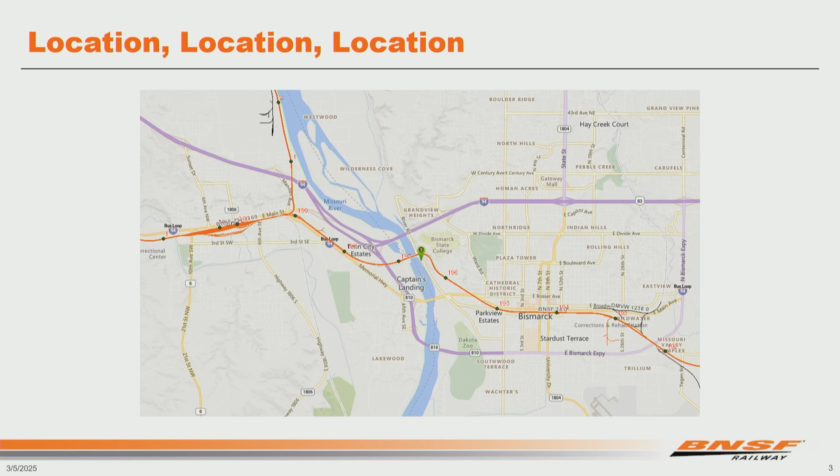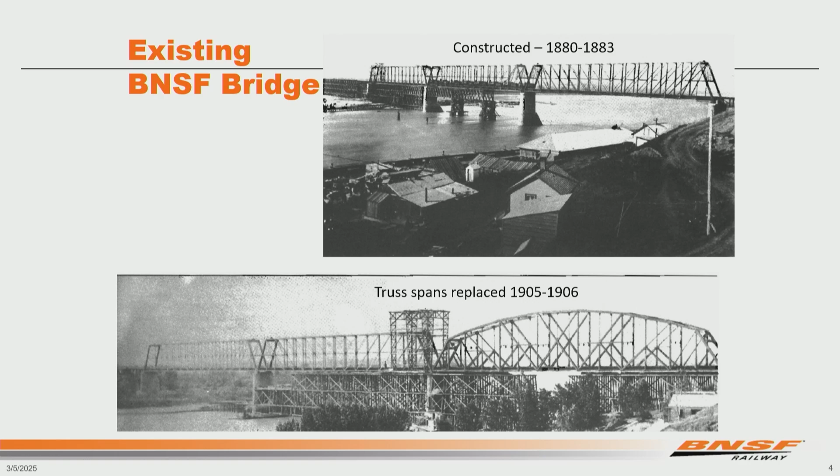Okay, let's talk a bit about our existing bridge. As far as what our project is, there are 3 areas that I'm going to hit on. On the screen now, we have some pictures from the original construction and a follow-up project that took place. The picture in the upper right-hand corner is the finished product from George Morison when they built the bridge in the early 1880s. And then on the lower part of the screen is the follow-up project that took place a few decades later where they had to replace the 3 truss spans.

This project to replace the spans was driven by the dramatic increase in the weight of locomotives and rail equipment. And for me, it hits on the point of everything has a finite life. And for these spans, it was a short life. It was only a couple of decades.

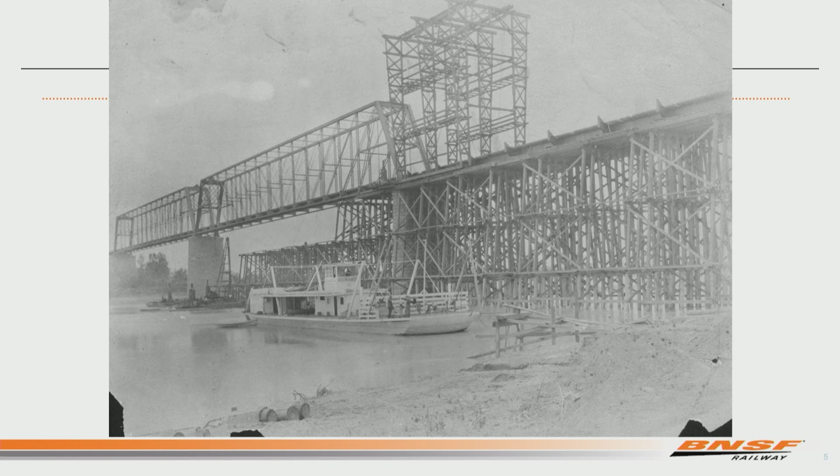I could sit here and geek out about looking at these pictures. I find them so interesting, looking at the construction techniques they used to replace these spans and do this big work back in the day when machinery wasn't as plentiful. I think about the amount of false work they're using to support the spans for disassembly of the existing spans, and that gantry system that they're using to assemble the new spans. And what I want to hit on with looking at these pictures is, first and foremost, BNSF's project is a condition-based replacement.

Cornerstone of bridge ownership is bridge inspection. It's getting quality and timely bridge inspections, watching how that bridge ages, watching how it responds under load, and then using that information to determine what repairs you need to make. Over time, for railroads, it's a matter of placing restrictions. In the case of this bridge, we currently have speed restrictions for trains traversing it, in addition to weight restrictions that prevent certain short, heavy cars and certain products from traversing the bridge, plus the inherent dimensional load restrictions you get with any through truss span.

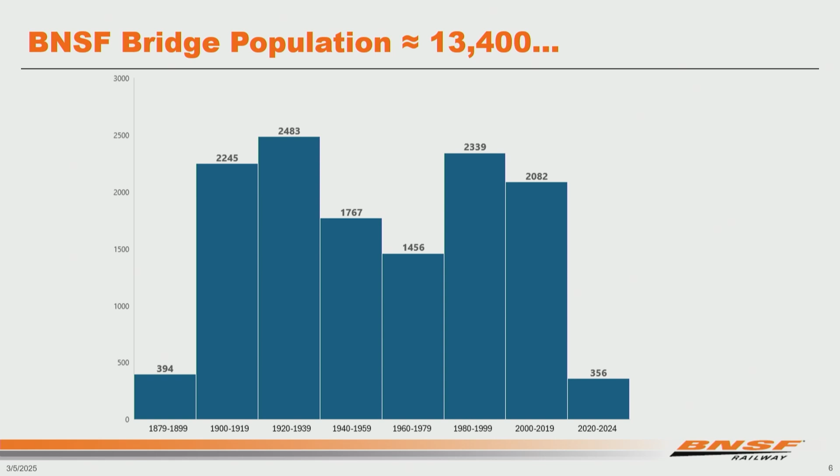The point I want to hit on with this slide, second part around what the BNSF project is, that $100 million price tag to replace this bridge in Bismarck is 100% privately funded. No grants involved. It's purely part of our capital replacement program.

Last point I want to hit on talking about the BNSF project is looking at the population of railway bridges over the Missouri River, from the headwaters in Montana down to the confluence of the Mississippi River in St. Louis. This bridge is one of 22 railway bridges that traverse the Missouri River. These bridges are owned by various Class 1s and short lines, and their age ranges from the 1880s to 2013.

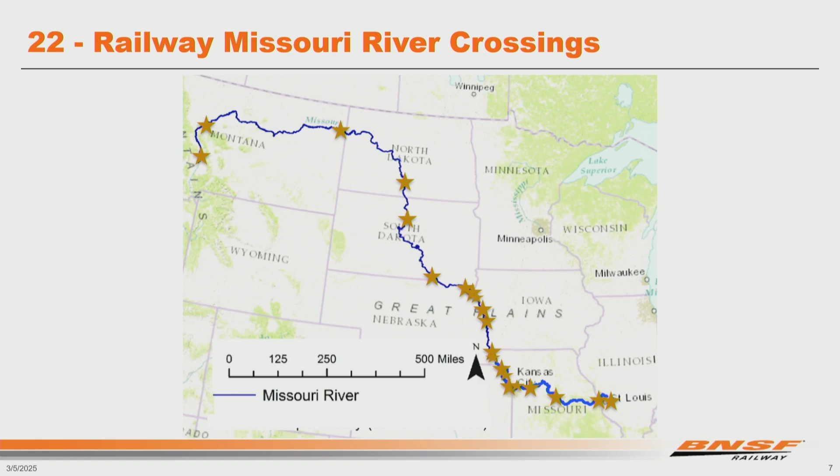The next few slides show some examples of other heavy bridge projects, these larger projects too big for us to do, and larger bridges where communities have a connection to their bridge. This one is a Trinity River Bridge just north of downtown Fort Worth, Texas. You can see the truss in the foreground, and in the background a couple other trusses. What's hard to discern in this picture is those trusses in the background are on subsequent tracks belonging to other railroads, and they were affectionately known as the Three Sisters Bridges.

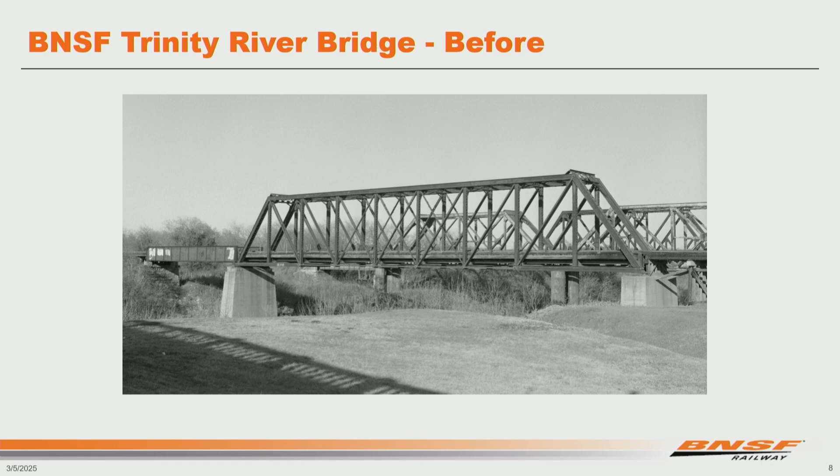When we came to replace this bridge, there was some emotion around it. It was a piece of history in Fort Worth. Some similarities this project has with the Bismarck Bridge project is our ultimate design concept utilized something other than truss spans. We were able to optimize it for cost and schedule, and the replacement concept went in with through-plate girder spans. The picture on screen now shows construction in progress, and this bridge will be done yet this year.

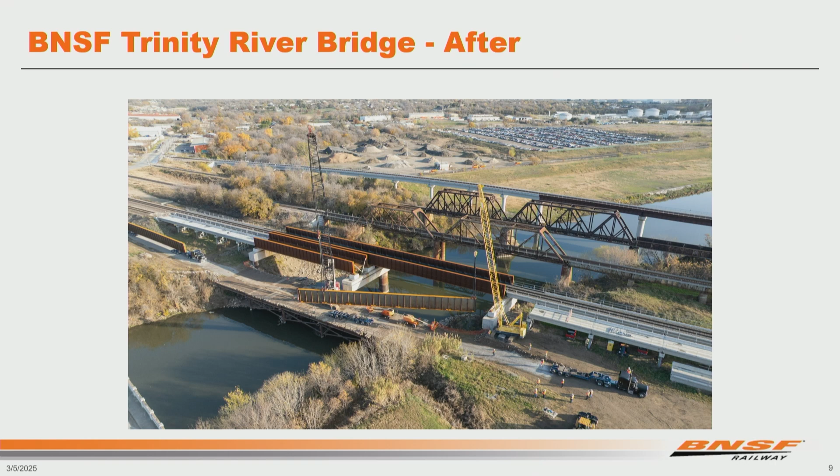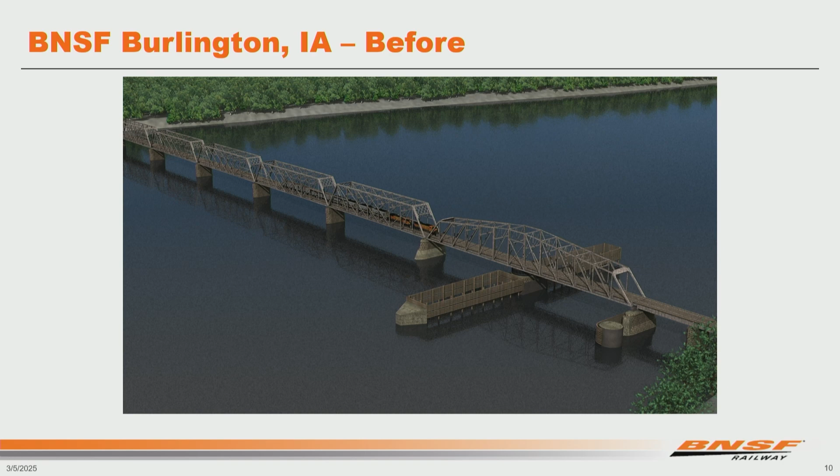Next example of a heavy bridge project, a little bit larger scale, a little bit more ties to the Bismarck Bridge. This is in Burlington, Iowa, over the Mississippi River. This is another George Morison bridge from the early 1890s. So this project, all these projects, are condition-based replacements. In this picture, you can see how the approach spans are being replaced with truss spans, and that was what made sense with regards to maintaining openings for marine traffic and the conversion of the swing span to a vertical lift span.

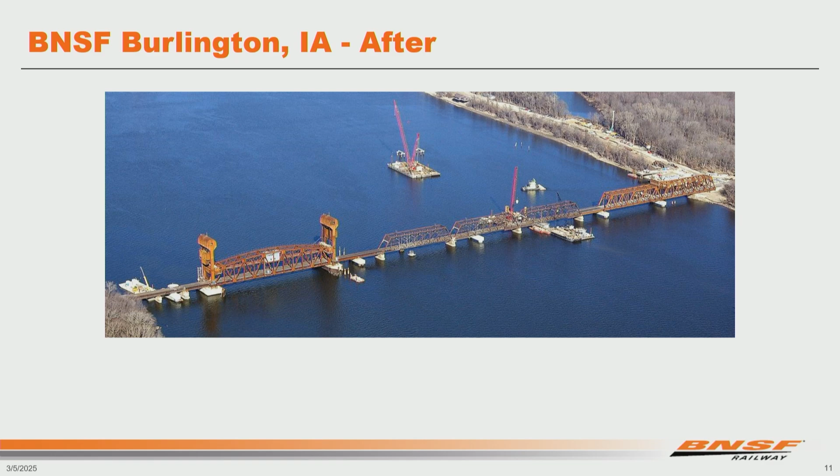Okay, shifting gears here a bit. Next topic, let's talk about what BNSF expects and considers when developing this project. Going into this project, BNSF had 3 criteria that we needed the replacement bridge to meet.

First and foremost, we wanted piers for the main river spans that could accept a future second track. We have no plans for a second track. This is just a step we take recognizing the cost, effort, and environmental impact associated with constructing these piers. We're willing to construct them essentially at our own risk, because if we ever do come back, this will be the most difficult part of the project, and that way it would already be constructed.

The second criteria is minimizing impacts on the environment and the public. And third, having optimal cost, schedule, and efficiency. Going through the rest of this presentation, there will be multiple examples of deliberate actions by BNSF to satisfy the minimization efforts talked about in criteria two.

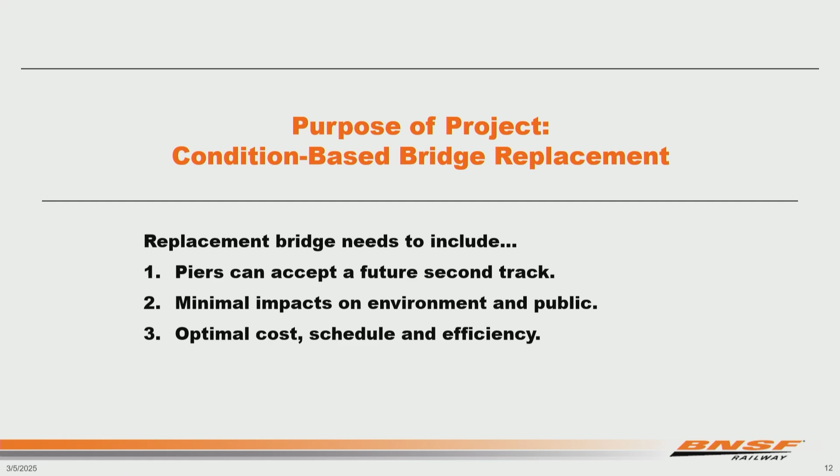Here's a map of the immediate area around the BNSF bridge. This slide shows features in the vicinity of the bridge that strongly influence the preferred concept. In the northeast quadrant, you have high bluffs with underground water reservoirs. Traversing across the bridge, you're roughly 90 feet above the water, landing on the west side where you're in a very tall embankment, roughly 75 feet tall.

Just a bit further west, you have the BNSF overpass going over the Bismarck Expressway. To the north, on the west side, you have the Missouri River Natural Area, and to the south, you have our neighbors in the Captain's Landing Township.

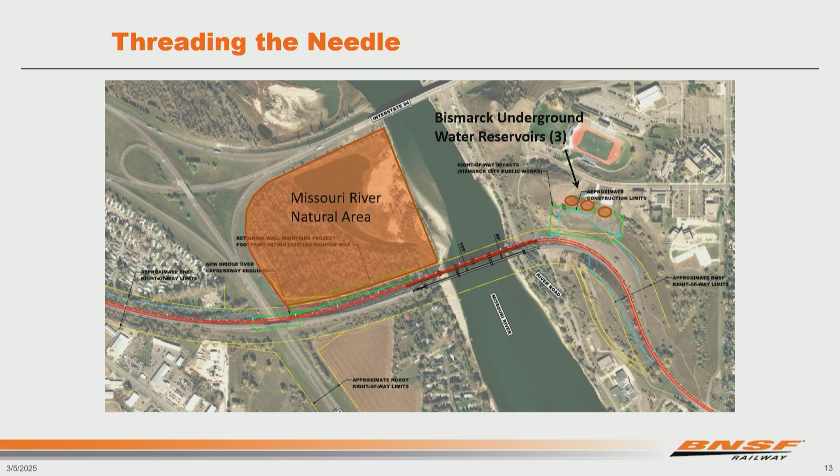During project development, it quickly became evident that to satisfy criteria 2 regarding minimizing impacts on the environment and the public, and criteria 3 for optimal cost and schedule, the replacement bridge needed to thread that needle through these features by staying within the BNSF right-of-way corridor.

Okay, this slide really gets at what we expect. This slide shows the 31 heavy bridge projects that have been completed over the last 10 years.

The 64 million dollar question at the start of developing this project: how long is it going to take? How long to have the design complete, permits in hand, land and easements acquired, any utility relocations, funding and contracts in place to start turning dirt so we could program this funding?

This slide shows all 31 projects from the last 10 years, and the duration represents the timeframe from signing a contract for design to signing a contract for construction. The current average looking at these 31 projects is right around 3 years.

One item to note, these bars are sorted by duration, not chronologically, so there's not a recent trend on what it's taking to get through the permitting process. Interestingly, the 3 most recent heavy bridge projects for BNSF that we are just now starting construction on were developed from the conceptual phase to signing the contract to construction in only 18 months.

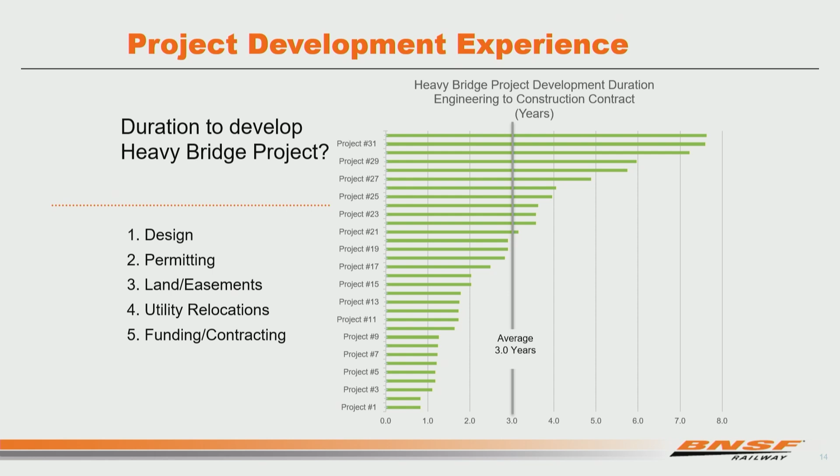The other question we often get is, as all these concepts were offset to the north, did you look at anything offset to the south? We did this intentionally, because any offset to the south would have encroached much more on our neighbors in the Captain's Landing Township. The permitting process for this project was emotional, and I'd suspect that encroaching on property people actually own would have made it that much more emotional.

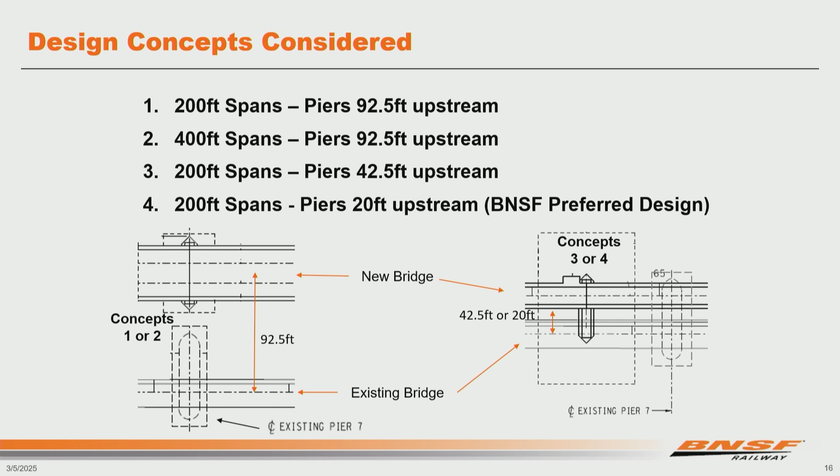A couple more comments about the design concepts considered. The first two, at 92.5 feet upstream, are illustrated in the lower left corner, showing the piers of the new bridge aligned with the piers of the old bridge. Having piers aligned like this, with that 92.5-foot offset, pushed us outside of our right-of-way or dramatically increased the cost to stay within it. Looking at concepts 3 and 4, offset much less, we were able to achieve a no-rise condition—however, that no-rise was only achievable with the existing bridge being removed.

So let's talk about why no closer than 92.5 feet—that seems like a heck of an offset. The reason is the upstream side of the existing piers, the icebreaker. What you see above water is not the full extent of that pier; as you go down below water, it continues to extend further to the north. At 92.5 feet, that only gave us around a 10-foot buffer between the edge of the existing pier and the edge of the cofferdam needed to construct the new piers.

So even with this minimal 10-foot offset from the existing pier, that poses a risk to BNSF during construction, where we could potentially compromise our existing bridge before we're ready to put the new bridge in service.

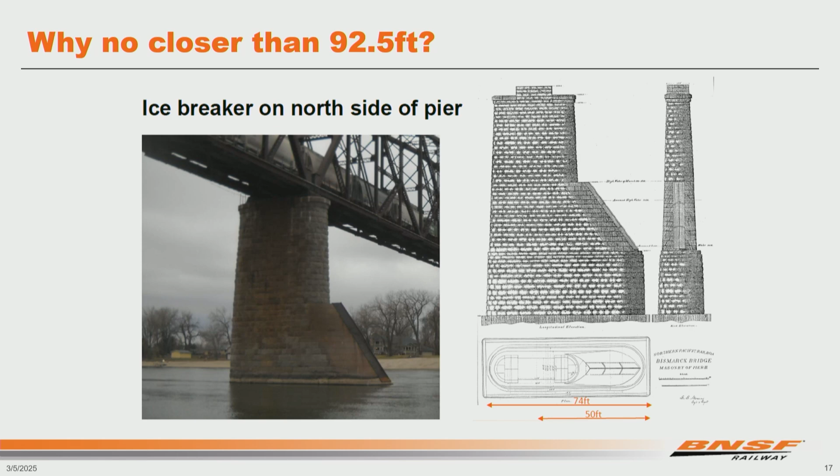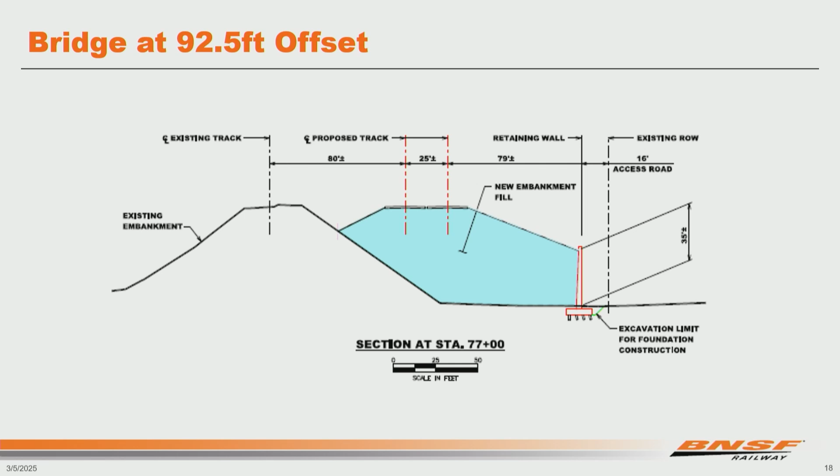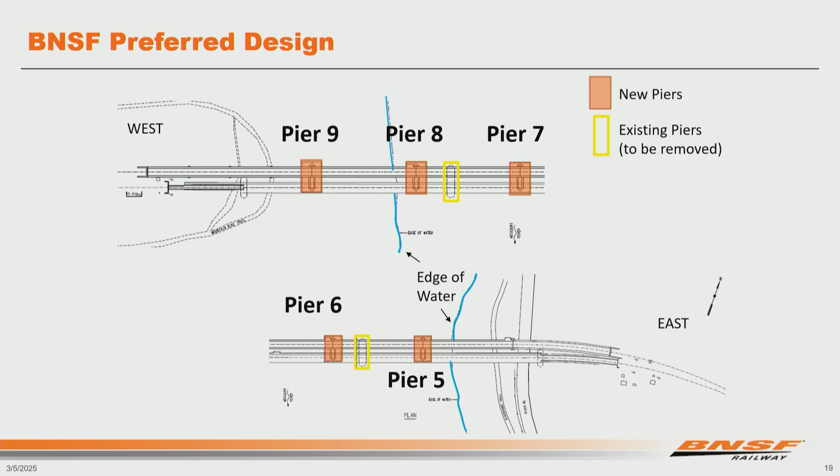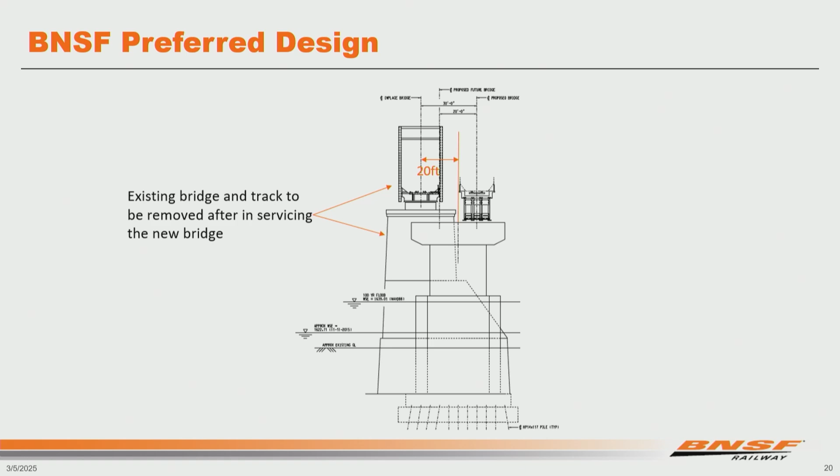This is the configuration we'll have once we line traffic over to the new bridge and before we start demo operations.

And lastly, I see a bridge that has minimized the impacts to the environment and community during construction.

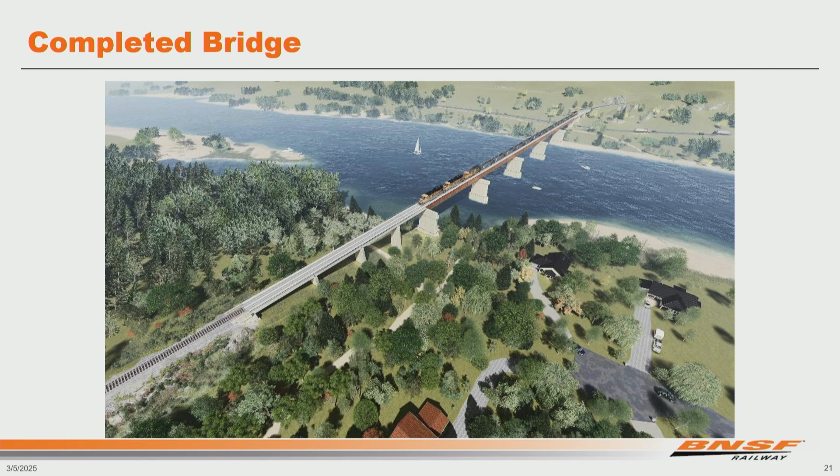What you may not immediately see in this rendering is the effort employed on the land piers. During the design, the land piers took into account the potential need for a future second track. The batter of the pile, the shape of the piers, the shape of the stems, have all accounted for that second track should it ever come to be.

To clarify on the topic of a potential second track, we have no immediate plans for needing one. That will be driven by train traffic, and should that day ever come where we need to build a second track, BNSF will have to go through the same federal permitting process to address the impacts associated with that project, long before any construction starts.

The west side of the river had the greatest need for material delivery, starting with a couple hundred thousand yards of fill to construct the new west embankment. At this time, I'd like to give a big thank you to the North Dakota DOT for working with BNSF on the need to minimize construction traffic on the Mandan residential streets.

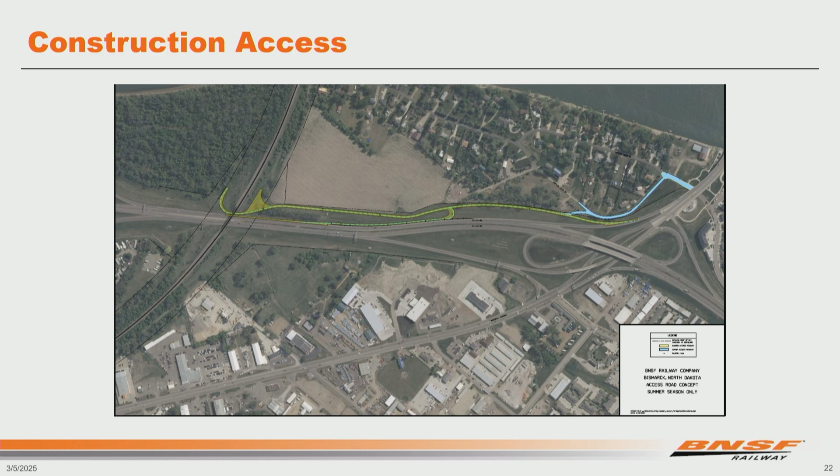Another effort BNSF has employed is to communicate with the public on the status of the project—what's going on, what to expect—because we understand there will be impacts. Seldom does construction happen and not impact somebody. BNSF is maintaining the BNSF bismarckbridge.com website.

A lesson we've learned from practically every project is more communication. Just when you think you've communicated enough with everybody, try to communicate some more, whatever means possible. Always look for that next step to improve, to ensure the public is getting good information about what's going on and what to expect, because in the absence of good information, people tend to make up their own story, and it may not be completely accurate.

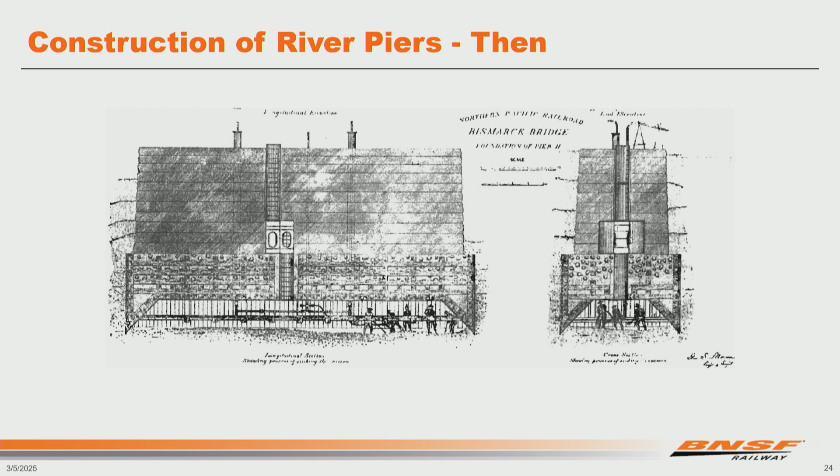We knew early on the river piers were going to be some of the more challenging aspects of construction of the new bridge. The new piers are comprised of multiple components founded on H-piling, going roughly 60 feet down below the excavation, utilizing a 10-foot thick seal course layer to act as a barrier to counteract the upward hydrostatic pressure.

Ultimately this provides us a dry working surface for constructing our reinforced section of the pier. Work in 2024 focused on Pier 7, which is the first wet pier on the west side, and kudos to our contractor, Ames Construction. In 2024, we just took on one river pier, and they learned a lot, they worked hard, and it'll help set us up for working here in 2025 on Piers 5 and 6.

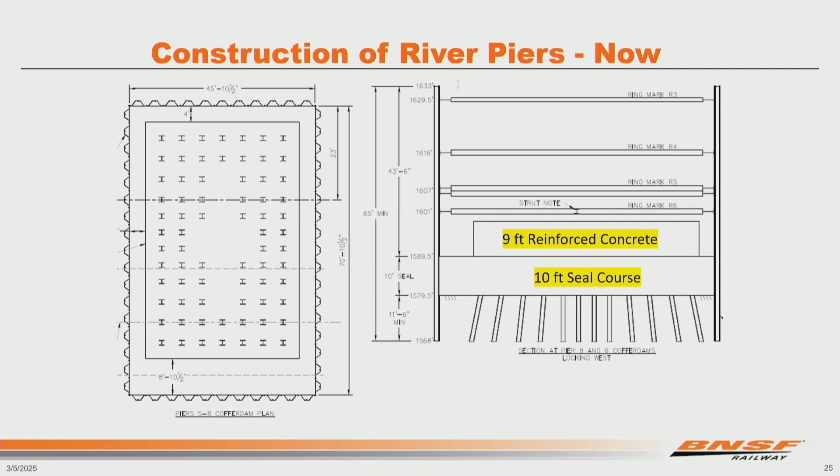Measure twice, cut once. What you're seeing in this drawing is an exhibit that shows more of all the unique batter for each line of piling. And I'll say this really wasn't driven by a design need. This is really driven by what it takes to fit all 72 piling in each footing and be able to miss the existing bridge above you.

You see on the right the batter for each pile. On the left part of the screen, you can see the exhibit showing a 4-foot buffer between the pile leads and the existing bridge.

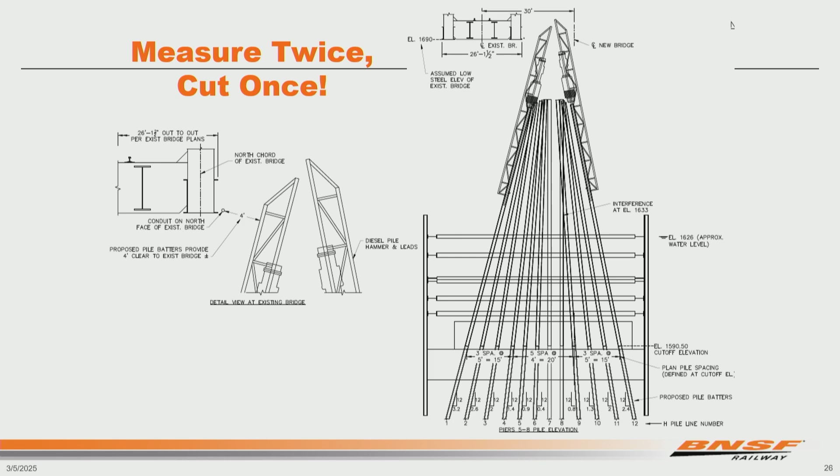This dock wall helps facilitate marine access for construction of the river piers and makes construction of Piers 8 and 9 essentially a land-based construction instead of having to utilize part of the marine fleet for a water-based construction.

One piece to minimize this stage increase you don't see are the culverts that actually run through the dock wall to help improve the flow during construction.

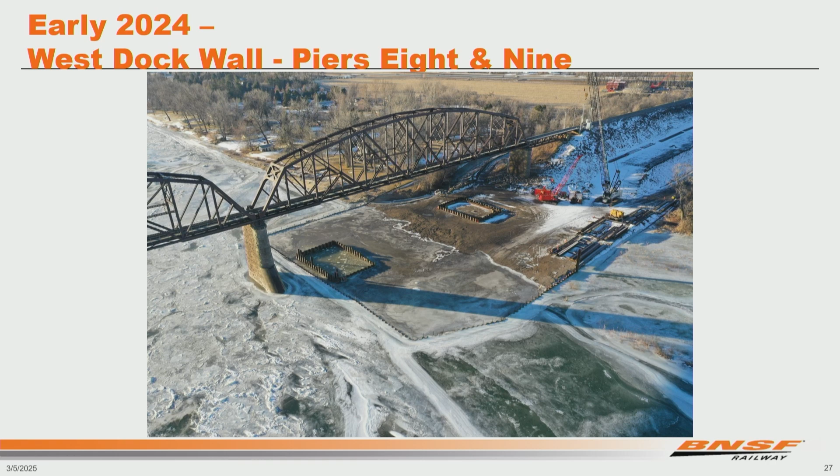And all this work is taking place while we're still running trains as normal. I will say the railroad is a very unforgiving environment, and it demands the highest level of dedication to BNSF safety culture.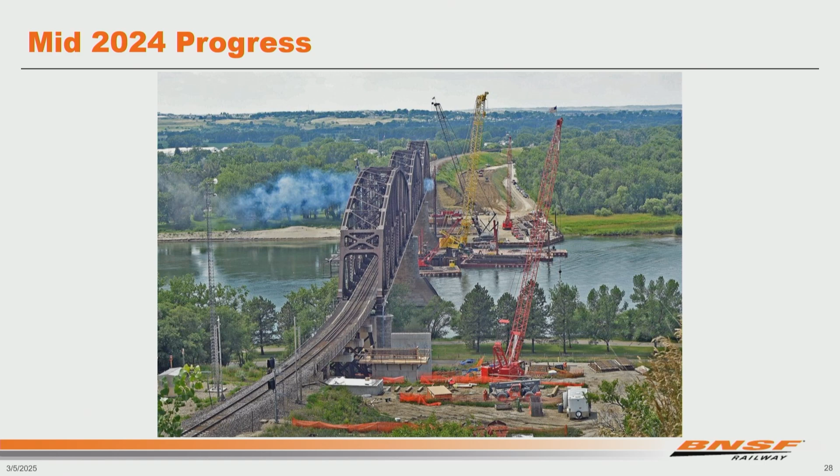BNSF has high safety expectations for our trusted contractor partners. Some examples of these expectations include just basic communication in the form of briefings, rebriefings, debriefings, to identify the work, identify the risks, and identify the efforts to mitigate these risks. This is an everyday occurrence taking place multiple times a day.

Compliance with BNSF's PPE matrix that lays out what PPE is required for each type of work, and the empowerment of all employees to basically call a stop to the work when they have concerns or questions.

This picture gives you a good view of Pier 7 towards the left-hand side. Pier 7 was the primary focus for 2024, which kept construction activities on the west side of the river. This picture shows intentional efforts to maintain that corridor for river traffic.

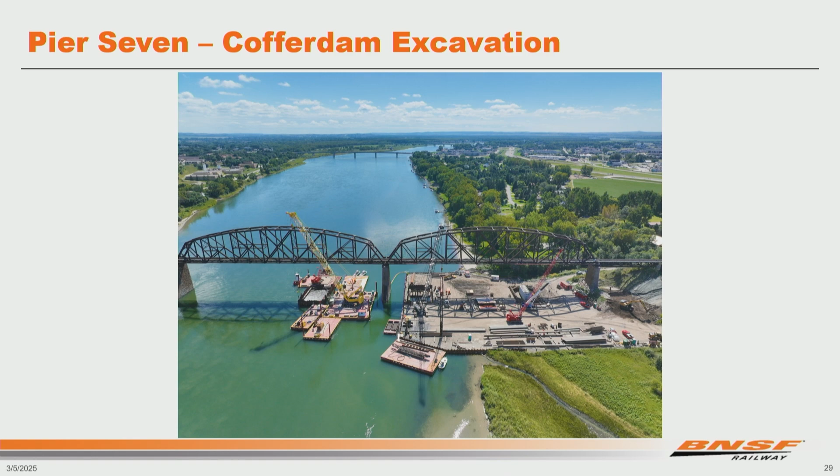Going into 2025, work will shift to the east side of the river on Piers 5 and 6. Mooring piling will be added along the edges of the river to help reduce cross trips across the river for marine resources.

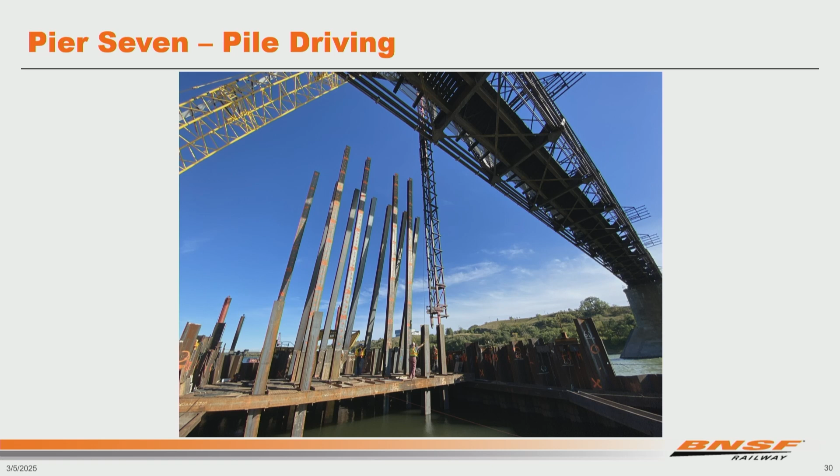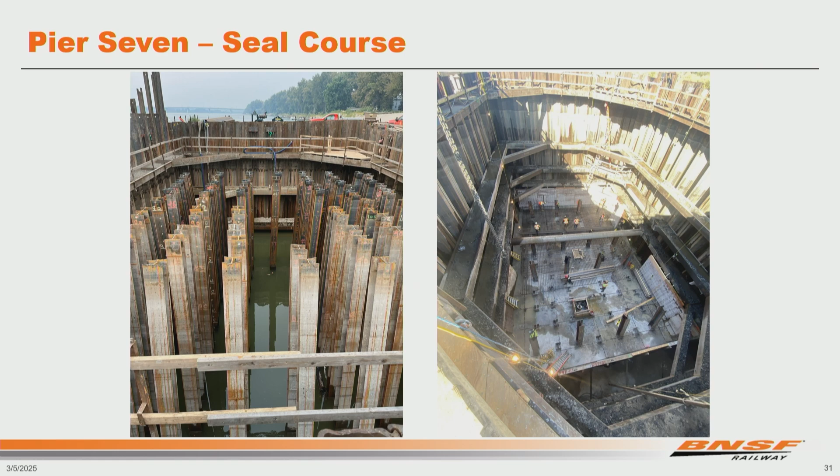This was a design modification worked through by TKDA and Ames. It was a win-win solution that allowed for better support of the reinforcing steel for the subsequent reinforced concrete on top of the seal course. It's a good example of how our trusted partners work together.

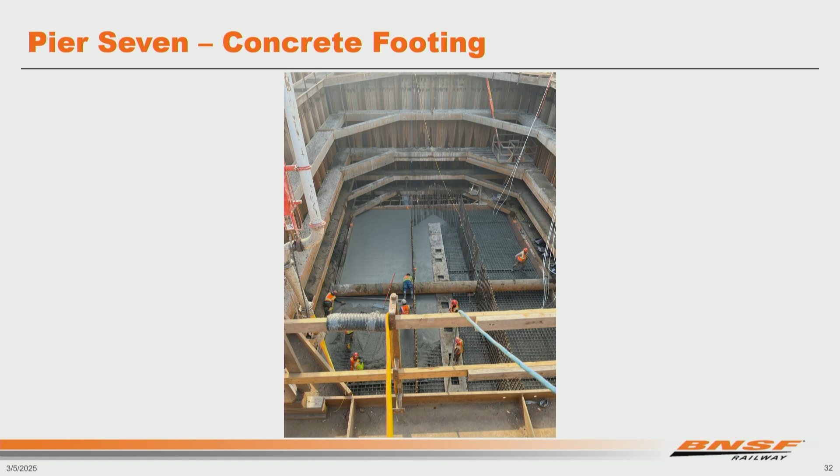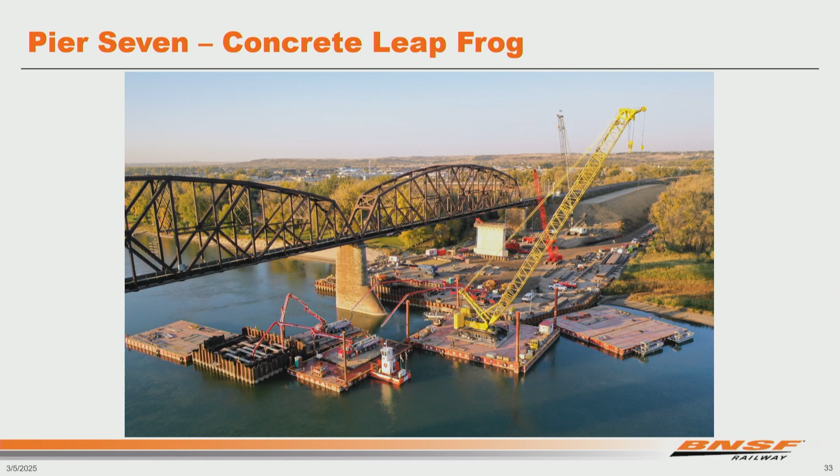Plan for 2025: our efforts will be focused more towards the east side of the river, constructing the two river piers, 5 and 6, in addition to constructing the land-based pier at 4, which is adjacent to River Road. With the increased amount of work on the east side and the limited workspace between the road and the riverbank, we needed to close River Trail to eliminate the possibility of commingling pedestrians and construction traffic.

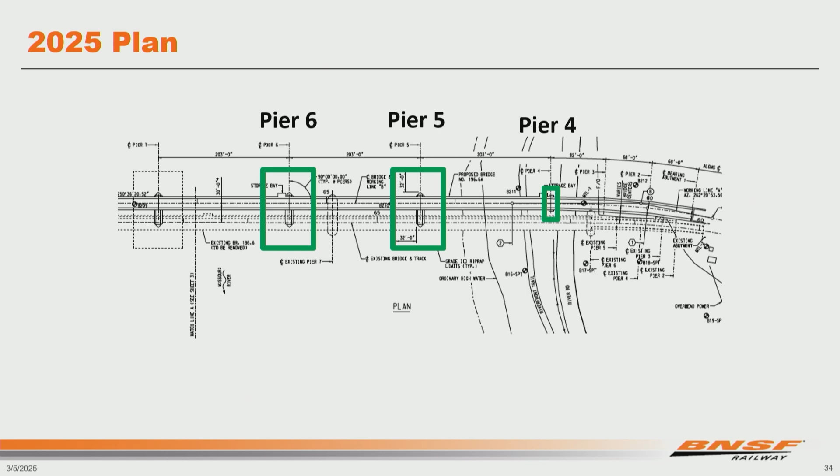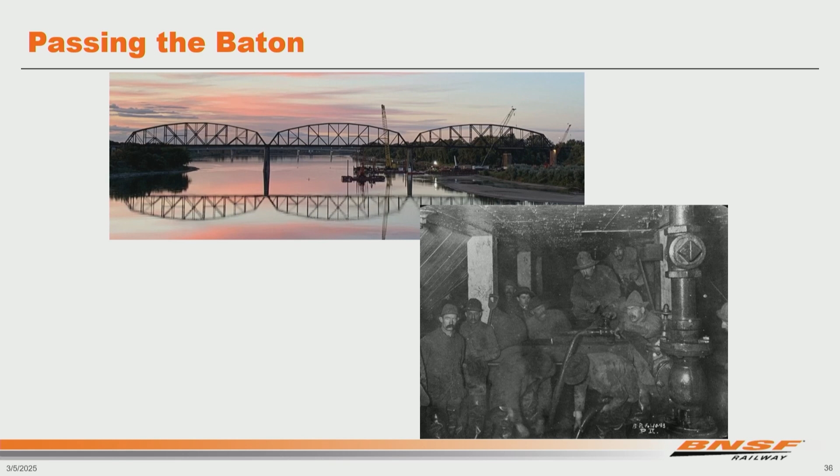Closing it out, I look at this as somewhat of a passing of the baton. Looking at the history behind this bridge, I get it—it's a really cool bridge. I geek out looking through the pictures and seeing how this was built, looking at the people that actually did the work. The picture in the lower right-hand corner is one of the few pictures showing the people inside the caisson doing the excavating, sinking that pier into place, and wondering what life was like for them.

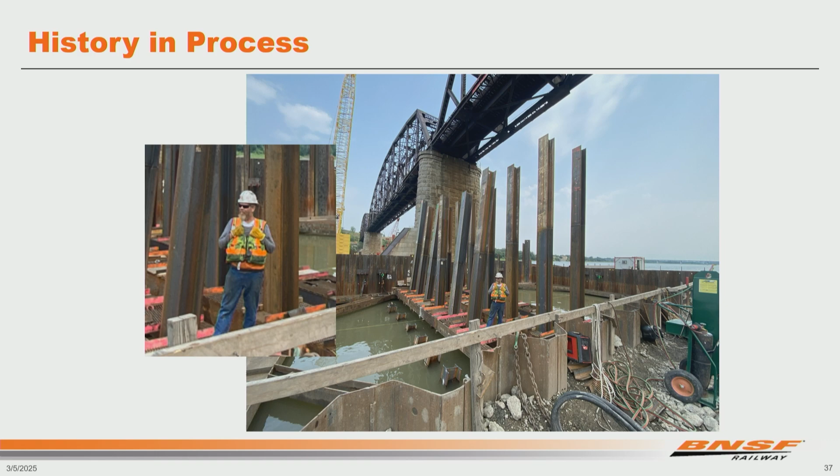And this is history in process. We're doing the same thing, different means and methods. This is Pier 7 under construction, and this is one of those same workers—this is Troy, Ames pile driving foreman. He plays a big role in making this work take place.

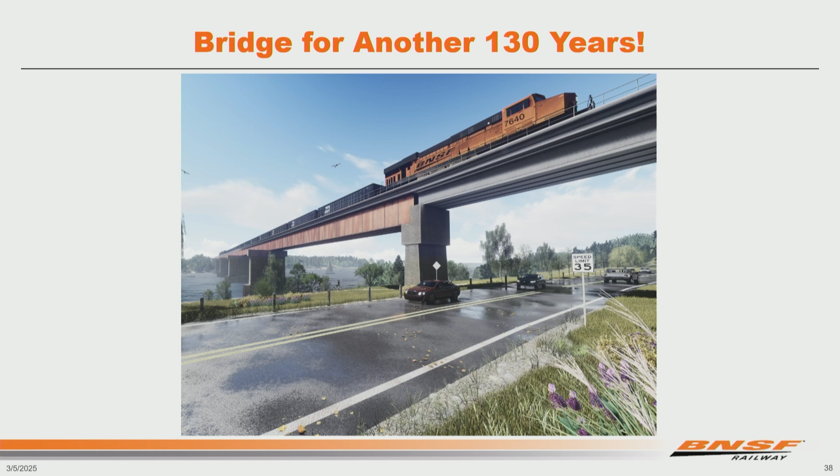I'll close out with another rendering of the new bridge, a bridge that'll be there for another 130 years. And with that, we got through right on time. I don't know if we want to do any questions.